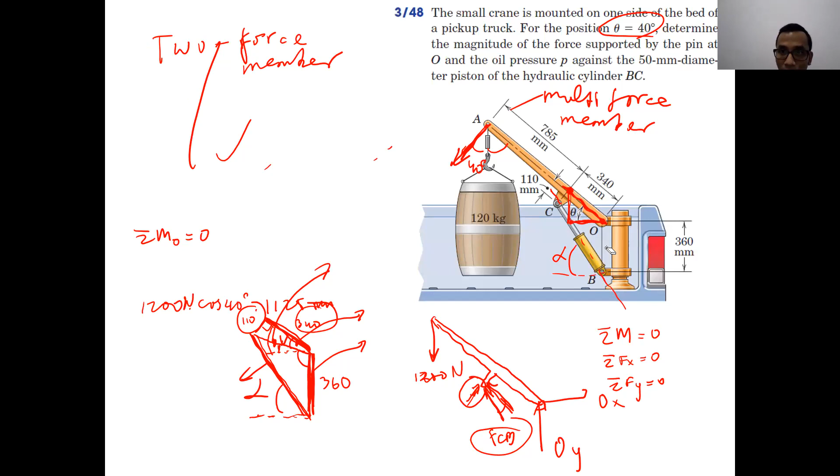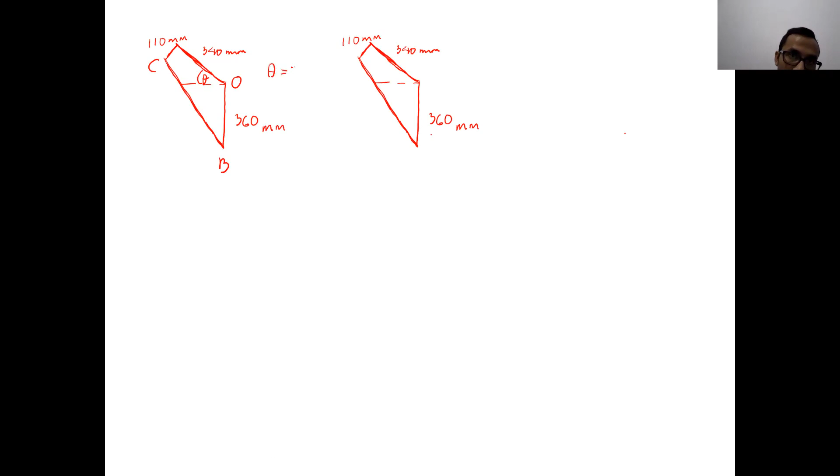And in order to do that, I redraw this particular part here. You can see there. This one is C, this one is B, and this one is O. So the first thing that we already know from the figure is that the angle here, theta, is 40 degrees. And what we want to find out is this particular angle, alpha. We don't know it yet, but we can do one thing.

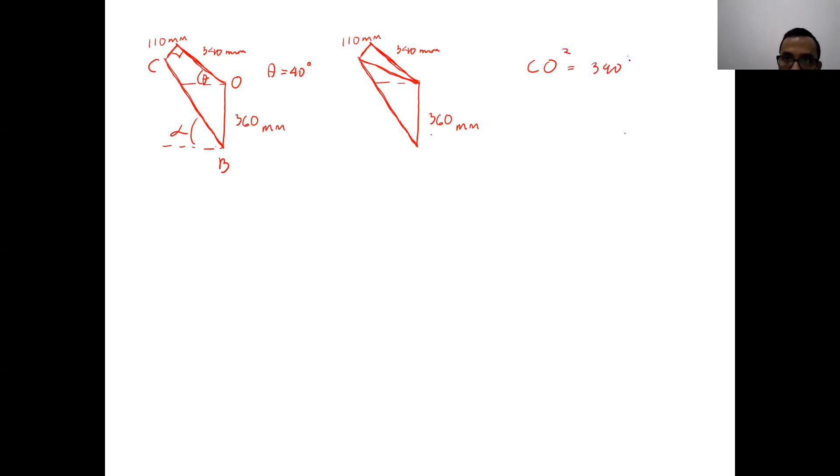First, remember that here is 90 degrees. Between 110 millimeters and 340 millimeters is 90 degrees. So using Pythagoras, you can find out this particular line, because that one is 90 degrees. I call that CO. CO squared is supposed to be 340 squared plus 110 squared.

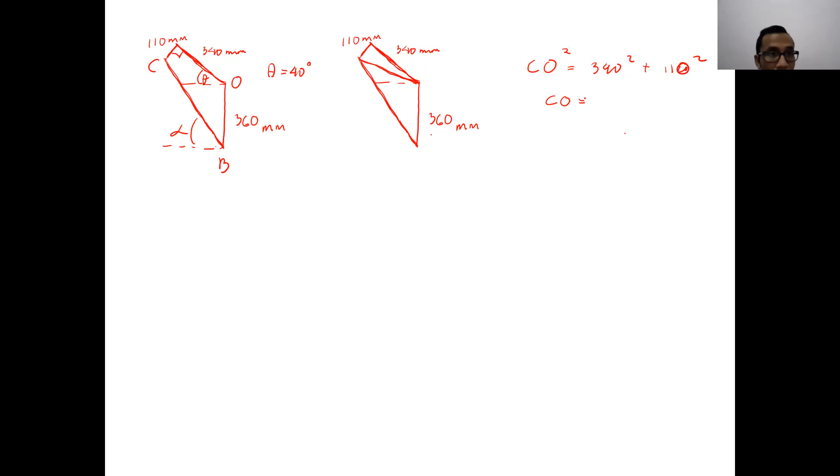Can anyone help me to find out the length of CO here? Adam? Hello, Adam. Adam is not on? Hello, sir. Are you calling me? Yes. Sorry, my connection is a bit bad. Yes, sir. Help me to find out the value of CO there.

It's 357.35. 357.35, that's the length of CO. Thank you, Adam. And now we can find out the angle here as well. I will name it phi. How to find out the angle over there? Remember that theta there is 40 degrees. And using this value and this value, we can find out the angle over here, the small part there.

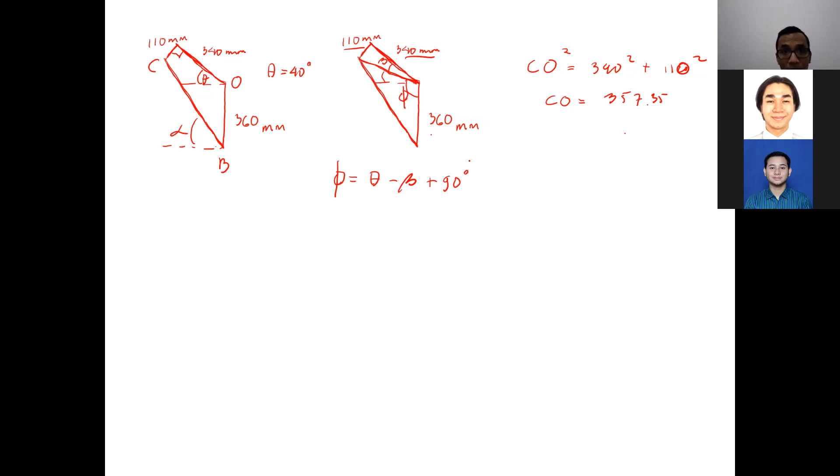So phi is supposed to be theta minus what? I will use this one as beta. So phi over there is supposed to be theta minus beta plus 90 degrees. Theta minus beta, it will be that part, plus 90 degrees. Rafi, can you catch up with this one? Yes, sir, so far. Okay, good. So we can find out phi there by using theta minus beta plus 90 degrees.

Beta there is simple enough. Tangent beta is supposed to be 110 divided by 340. So beta is arctangent of 110 divided by 340. Rafi, would you mind finding the value of beta in degrees? It's 17.92. 17.92, like this. Yes, sir. Thank you. So we found beta.

That's why we will be able to find phi over there. Theta is 40 degrees, beta is 17.92 degrees, plus 90 degrees. Rafi, what is the value here for phi? It's 112.08. 112.08 degrees. Thank you, Rafi. That is phi there.

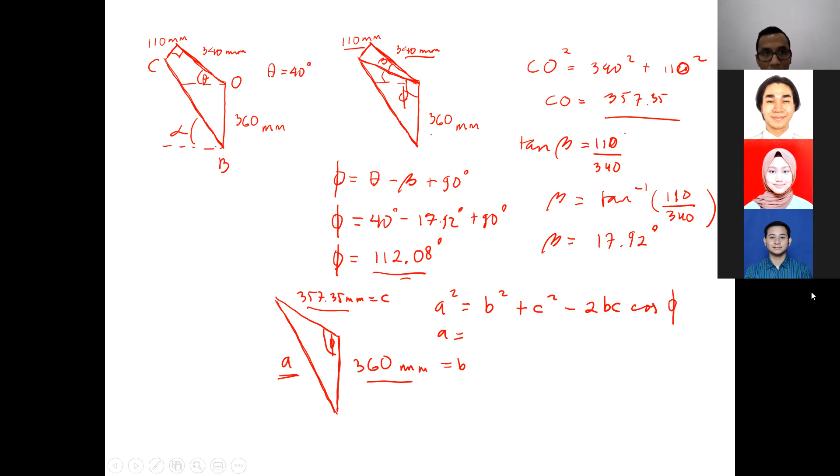Amadia, would you mind helping me find the value of A? Because I don't want to calculate it one by one. What is the value of A using the equation? So it's in terms of, wait, cos theta. Theta is 112 point... Yeah, phi there is 112.08 degrees. So what is the value of A? 1,107.02. 1,107.025.

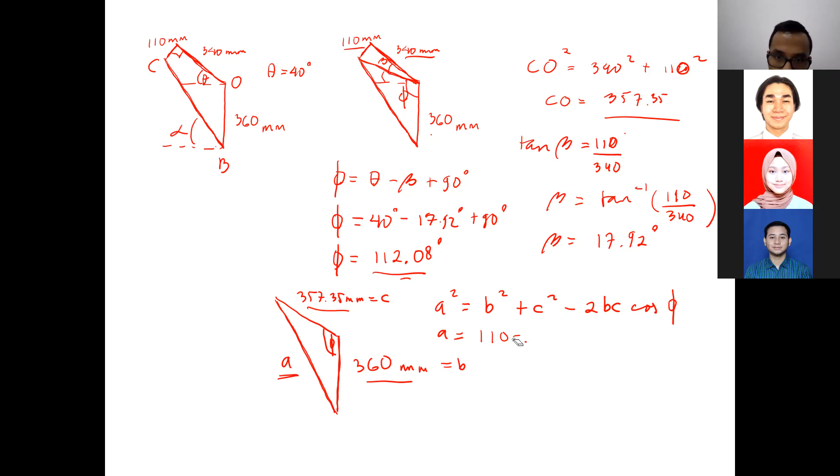Wait a minute. No, it seems like there is a miscalculation here. I don't think that is possible. It's supposed to be less than 700. Did you use minus or plus here? Oh yeah, sorry. You used plus, right? 594.99. Yeah, that one is more logical. Sorry, 500? 94.99. 594.99. Okay, that's A.

After we know the value of A, then we can find out all the angles here. So how to find out all the angles there? Basically, you can just divide the sine of the angle in front of the side by the length of the side, and all of those are supposed to be equal. In this case, I will just use another labeling. This one is A, this one is capital B, this one is capital C.

So sin A divided by a equals sin C divided by small c, equals sin B divided by b. All three are supposed to be equal, using the sine rule there. By doing so, we will be able to find the angle C here. So alpha is supposed to be 90 degrees minus C. After we find out alpha, everything is finished.

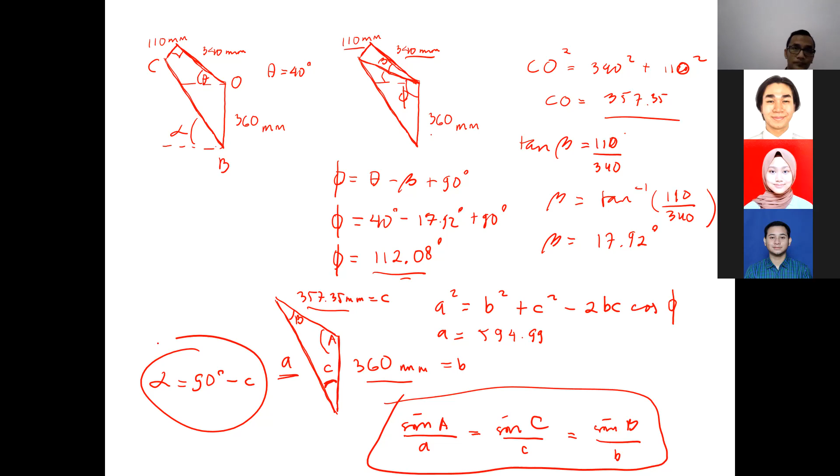So please try to read again what you learned about geometry, because sometimes we still have to use these geometrical equations in order to solve our problem. So that is about this particular problem. I believe you can solve it after you know how to get all the angles. Everything becomes much easier after we get the angles.

Now let's continue with this one, the next problem that we discussed yesterday. Yesterday we discussed the free body diagram at each pulley, and we already solved all the forces happening at each pulley. And remember, when we talk about this particular problem, we have to take a look at the forces that the pulley exerts on the beam. That's the main idea here.

Basically, we don't know the dimensions of the pulley. If we don't know the dimensions of the pulley, it will be quite hard to include the pulley in our free body diagram. That's why what we can do is find the reaction force from the pulley towards the beam. That's what we tried to find yesterday: Cx and Cy, and Dx and Dy, which are actually the reactions from the pin towards the pulley.

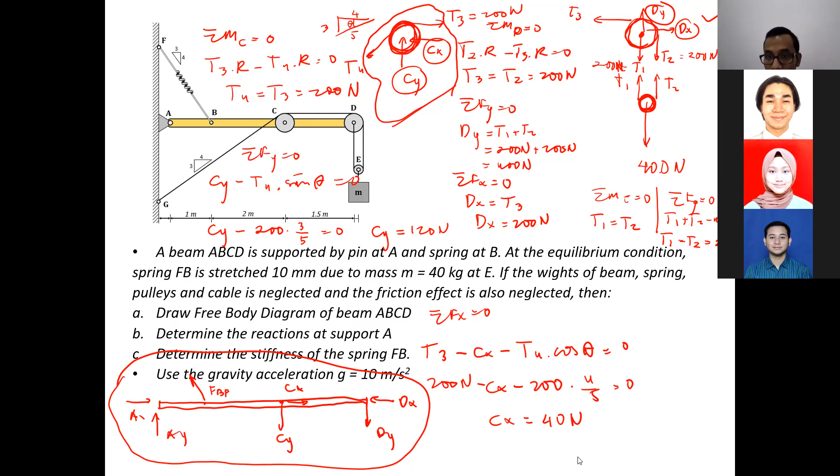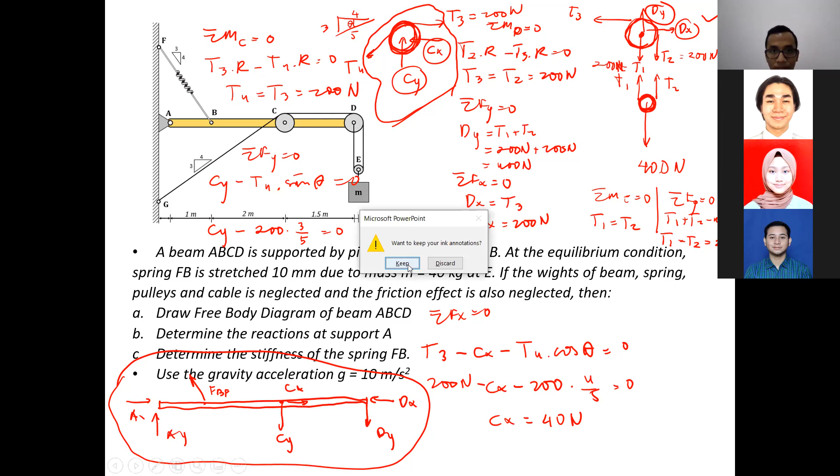Anyone here want to ask a question? Anyone? If you have any question, please ask me now.

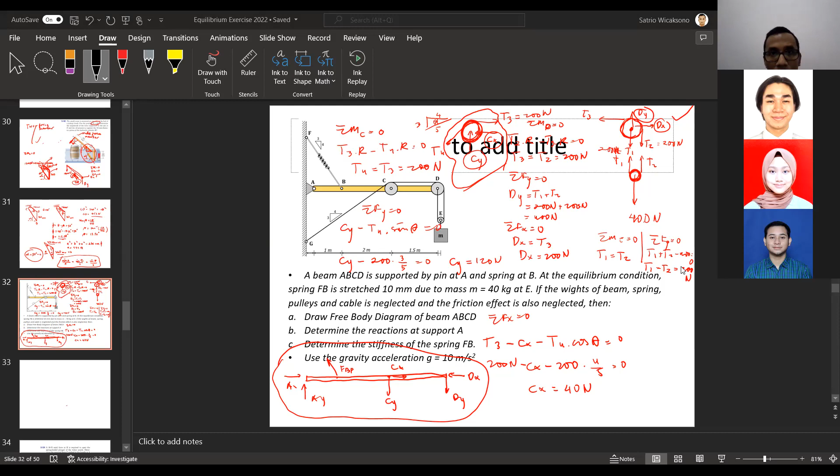Okay. If there is no question, then I will discuss some other problem example. This is the last problem example for us to practice. Wait a minute. Yeah, there are several problems here that we can practice together. Okay, I will discuss some of it. Share screen.

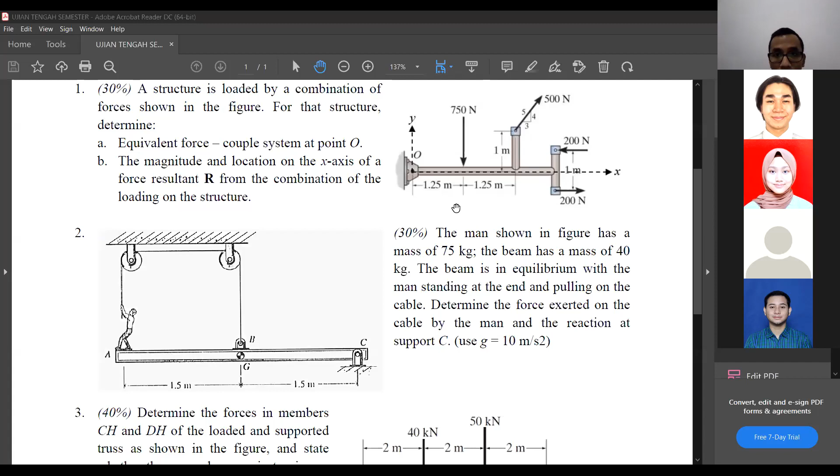These are some of the problems that we had in the previous exam. This is from 2017. You can see that the first problem, when we talk about the first midterm, is normally about the moment, force, resultant. How can you move the force? How to find the resultant, like that? Normally the first problem is always like that. The second problem normally is about the free body diagram and the equilibrium, and this is the example of the second problem.

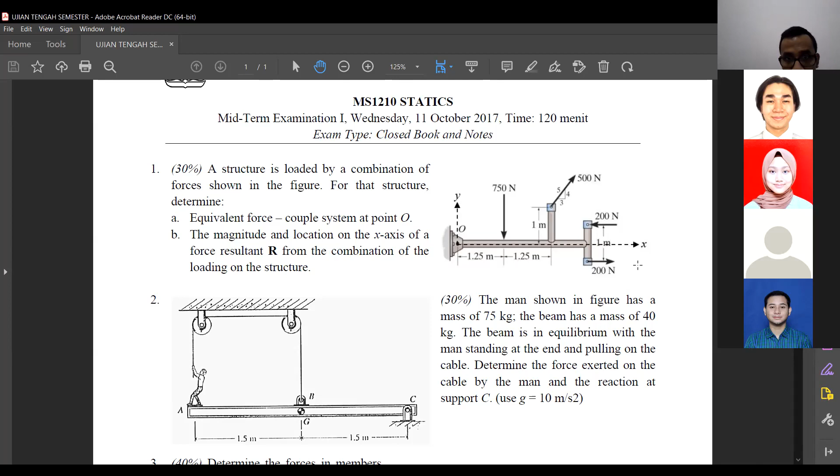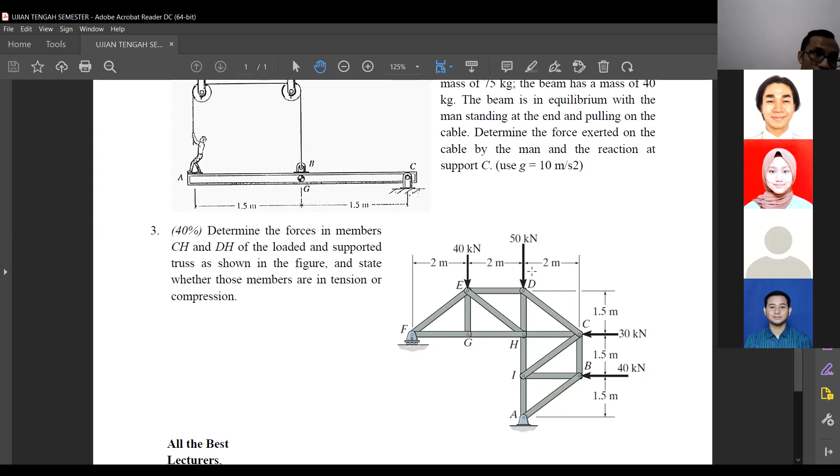The one that I want to discuss today is the second problem. Starting from next week on Thursday, we will start with the first problem. But for today, I will try to finish up with this case, with equilibrium. So let's try to take a look at problem number 2 together.

The man shown in the figure has a mass of 75 kilograms. The beam has a mass of 40 kilograms, evenly distributed. The beam is in equilibrium with the man standing at the end and pulling on the cable. Determine the force exerted on the cable by the man and the reaction at the support C. How can we solve this? Okay. Anyone here can help me to solve this?

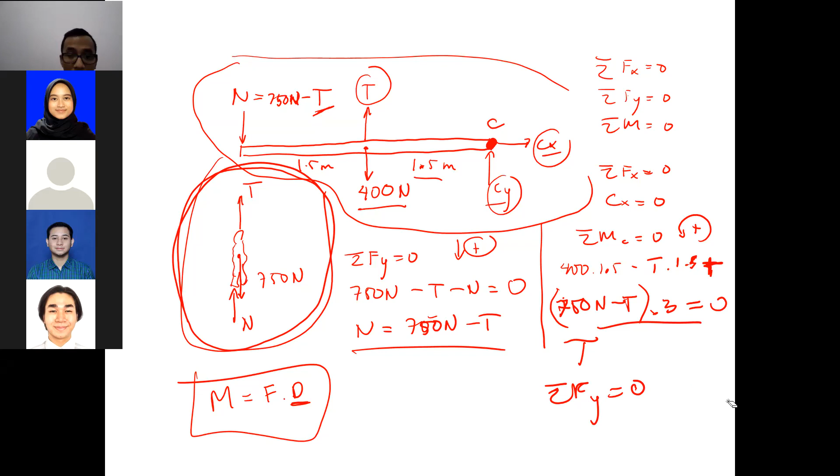Oke, jadi tolong review lagi bagaimana cara mencari momen, kemudian bagaimana mengimplementasikan persamaan-persamaan equilibrium untuk bisa menyelesaikan permasalahan. Persamaan equilibrium itu selalu di tiap diagram benda bebas biasanya cuma ada 3 ini. Cuman ada di beberapa kasus seperti yang ini, cuma ada 1 karena sigma momen nggak bisa dipakai, gayanya semua ke satu arah, kemudian sigma fx nggak bisa dipakai karena gayanya cuma ke arah atas, cuman sigma fy doang yang bisa dipakai di sini.

Oke, nah persamaan-persamaan tersebut itu bisa kita jabarkan untuk menyelesaikannya. Jadi sigma fx sama dengan 0, kita coba jabarkan apa aja gaya-gaya yang arahnya ke arah x, totalnya sama dengan 0. Kalau di sini kan cx doang ya, cx sama dengan 0.

Terus kemudian sigma fy sama dengan 0 untuk yang di atas ini. Berarti di situ akan ada cy ditambah t dikurangi 400 Newton, dikurangi n sama dengan 0. N-nya bisa diganti 750 Newton minus T, seperti itu. Kebayang ya, Zakia ya?

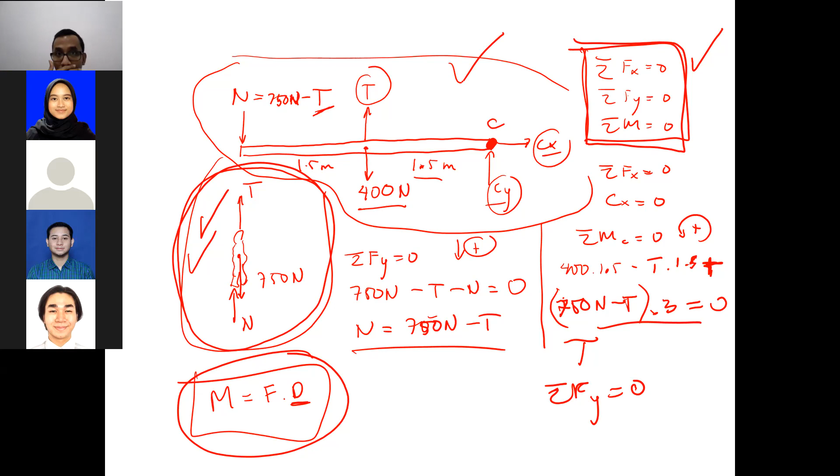Ya. Okay, so for this particular problem, that's the way to solve it. Okay. Wait a minute, let me check.